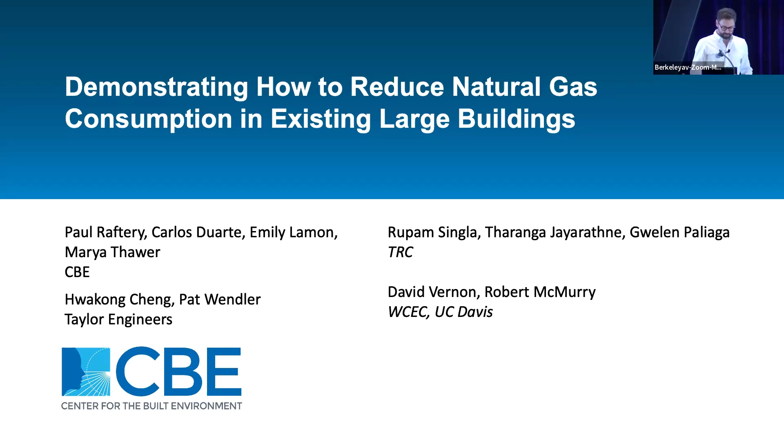Today I'm going to be talking about existing buildings and how we can reduce natural gas consumption in that building stock. So this is part of a much larger California Energy Commission funded research project that was focused in on the space heating and hot water systems in these buildings. And the reason we focused in on that is because it's by far the largest gas consumer. Relatively little in large commercial buildings is used for domestic or service hot water. Most of it's for space heating.

And this project was pretty large. It had a broad scope. Some of you may have seen me speak about this or aspects of this in past meetings, but we were measuring performance and losses from these components in both the lab and the field. We were gathering data and analyzing it from literally hundreds of buildings nationwide. And then we were also going out into real buildings and demonstrating how you could do reductions in a couple of different sites. And today I'm going to be talking about the two primary demonstration sites that we had for this project.

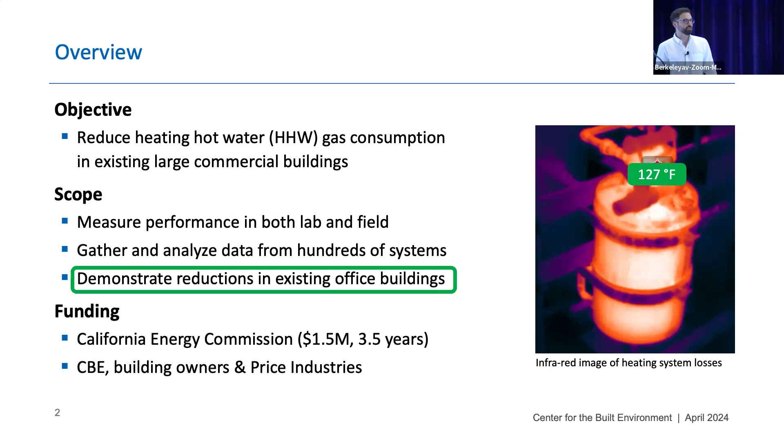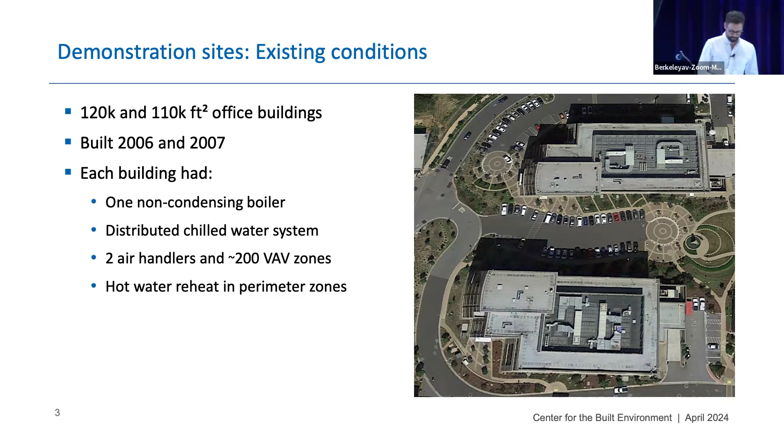At a very, very high level, the efficiency measures were we brought the existing controllers up to ASHRAE Guideline 36, so kind of a standard set of control sequences that represents current industry best practice. And then we replaced the existing boilers with very small high turndown boilers. That project was planned to happen anyway, so it was the kind of end of life redundancy project. So we were leveraging that as part of this with our partners, the building owners.

Now, it's important to note that the controls work we did here was really in-depth. Though we didn't replace the existing controllers throughout the building, we did go down to every single individual zone level and fix everything we could without replacing the controllers. So we corrected zone minimum airflows, we identified and fixed passing valves, we capped bypasses at the zone level.

Up at the air handler, we not only made sure that there were resets for supply air temperature and hot water temperature, but we actually made sure they were working correctly and then used trend data to basically ensure that they're resetting over a really wide range of temperatures, much wider than you would normally see.

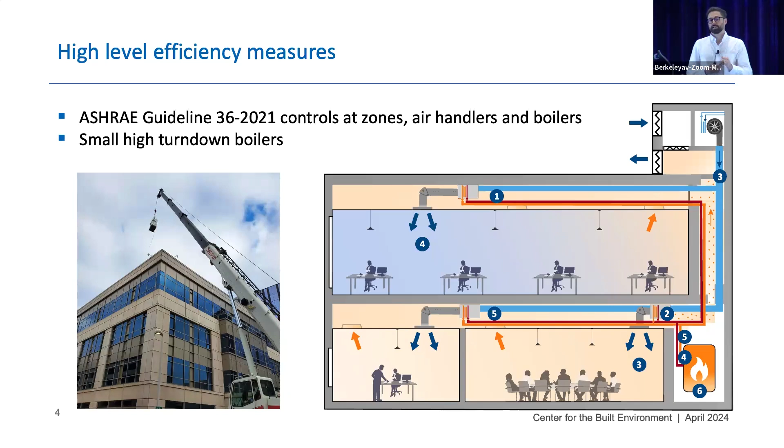So for example, these buildings were designed and operated to 180 Fahrenheit supply water temperature. In the post-retrofit condition, the maximum temperature they run at is 140, and they sometimes reset as low as 90 Fahrenheit supply water temperature in the summer in an existing building. So we really went to a lot of detail before we replaced the boilers. And then when we replaced the boilers, we put in really small high turndown equipment.

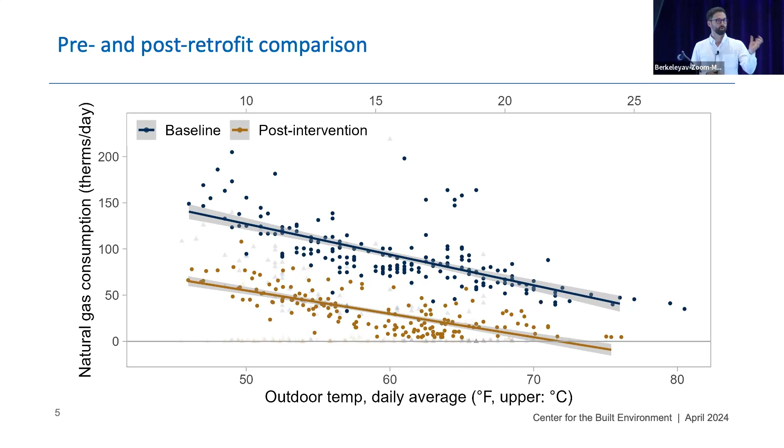And the results show really large natural gas savings. This is the PG&E utility bill meter. This is daily gas consumption on the y-axis. And then on the x-axis, we have the average outdoor temperature on that day. The blue line shows the pre-retrofit condition before we did anything. And then the yellow line shows the post-retrofit condition, which is both the effect of the boilers being replaced and the controls retrofit. Overall, this is a 71% reduction in natural gas annually on this building.

We had a second building. We saw 69% gas savings in this with a slightly higher base load in that building. So overall, we're seeing really huge site level emissions reduction here. 70% of the scope 1 emissions of these buildings was cut by these combined measures.

On the electricity side, we also saw savings, but those are a little bit more hard to quantify because we had to rely on submeter data that was installed after the boilers were operational, which is also in the middle of the pandemic, so it's a little bit messier. But as best as we can tell, there's about a 20 to 25% electricity savings on the fan energy and a 40% chilled water savings on the building where we had the meter to quantify that.

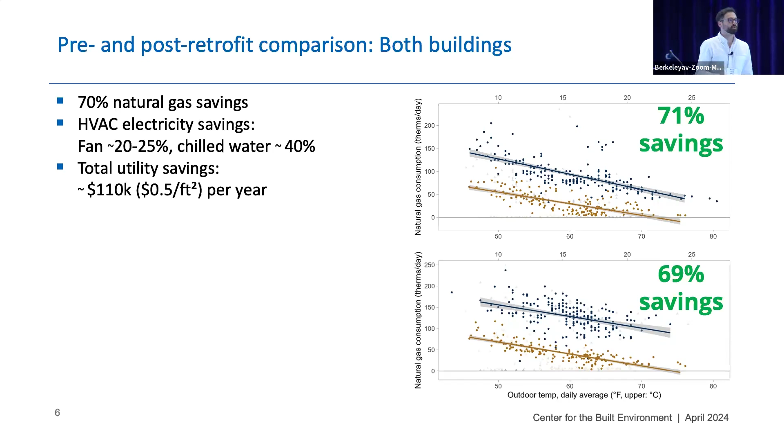Overall, the estimated utility savings are over $100,000 a year, or about 50 cents a square foot per year from the combined set of measures. So it's super clear to me that if we want to really reduce emissions in the existing building stock, we should be going out and doing this at scale in every building. And I hope the portfolio building owners in the audience are looking at this and going like, how can I leverage this, and come talk to me afterwards.

But if we wanted to reduce emissions further in these specific buildings, these two specific buildings, what would we do? So we also looked into that. And of course, the answer is you would electrify to further reduce natural gas consumption by installing a heat pump to service that heating load. And there's always a question about how large that heat pump should be. So this is one of the things that anybody who's working on these projects faces.

And you have to consider things like first cost and operational cost, space, weight constraints for a roof that wasn't necessarily built to support the weight of an air-to-water heat pump, service capacity, embodied carbon of the equipment and the refrigerants. And I wanted to kind of walk through some of those decisions and look at what that would actually look like for these two buildings.

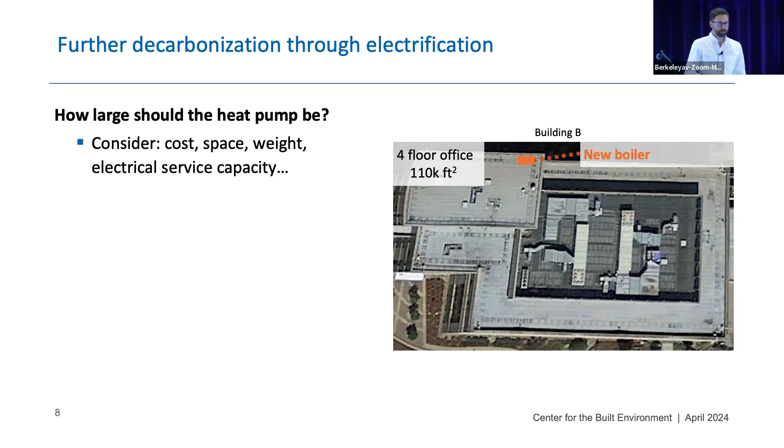So this image here is the satellite image of one of the rooftops, and the footprint of the two new boilers is there in orange. This is what an air-to-water heat pump would look like if you were to fully electrify that while maintaining the exact same capacity as those two new boilers, which are very aggressively sized.

So we also wanted to look at a partial electrification option here, and that's the footprint of an air-to-water heat pump that's 14% of the boiler capacity, and that's at the heating design day condition for this location. That corresponds to actually being able to serve about 20% of the peak measured load in the building, because there is a little bit of a redundancy requirement for the actual site.

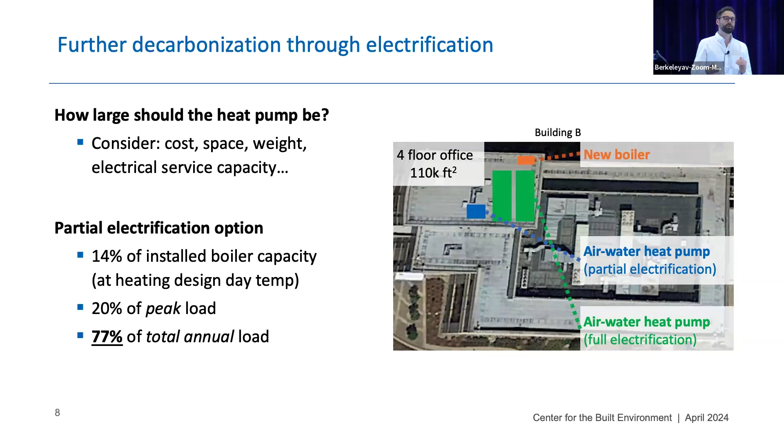But the really interesting thing is that that tiny little heat pump can actually electrify 77% of the annual heating load in these buildings. And that's for a couple of reasons. One is because most of the time heating loads are really low, so you just don't need that capacity. And then on top of that, as it's warmer outside, when you move away from those heating design day temperatures, heat pump capacity also increases. So when you combine those two things, you end up with a huge amount of the load annually that can be electrified.

And there are other considerations, mainly that electricity grid emissions vary with time. Here you're seeing an actual real day just this year in February, and the x-axis is time, and the y-axis is the grid marginal emissions. These are the short-run emissions. So the way I think about this is, if I was going to consume 1 more kilowatt hour of electricity right now, what is the generator that would be responding on the grid by increasing its output? And as you can see, in the middle of the day, it drops down because California has a pile of solar on the grid.

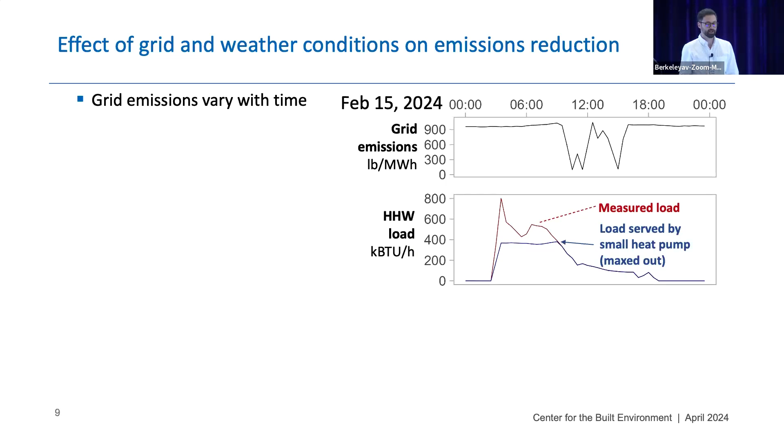Now, layering on the measured load in this actual real building, you can see that is the red line. And currently, that's being serviced by a gas boiler. If we had that tiny little heat pump, it wouldn't even be able to meet the load on a February day, not to mention on a design day. You can see it's maxed out there, that little blue line.

But you might also notice that the times when you have a lot of heating, in this post-retrofit condition where we fixed up all the controls and got rid of all the simultaneous heating loads that shouldn't be there in the first place, the times that you have the remaining heating generally correspond with high grid emissions hours. It's winter mornings when the sun isn't up. On top of that, it's colder temperatures, so your heat pump is less efficient and it has less capacity.

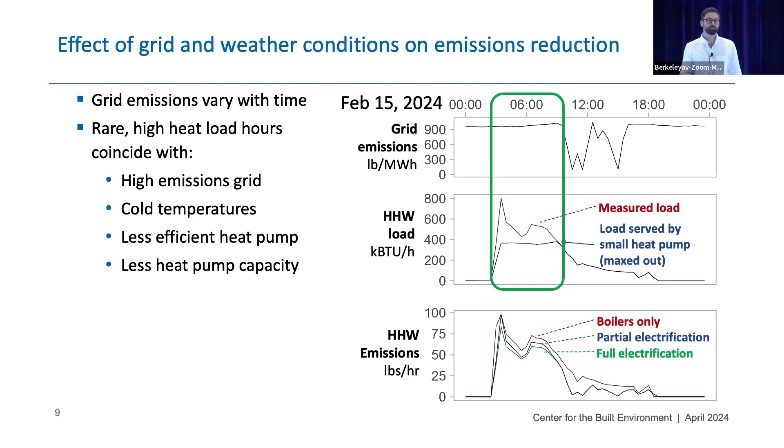When you layer all these things together, when you look at the actual heating emissions from this actual real system and then the two alternate cases, you see that there's relatively little emission saving on today's grid right now from this particular intervention at those particular times of day. You do see savings from partial electrification and you do see savings from full electrification, but at that specific point in time, they're not as large as many people would expect.

And stepping back for a second before we show the annual results, we saw enormous emissions reduction potential with operational cost savings from a deep energy retrofit measure. We saw 70% on-site natural gas reduction and 50 cents a square foot per year of energy savings. If we do that first and focus on that at scale, it will make electrification of the building stock easier because you'll have smaller equipment, and it will put less stress on the grid when you go and electrify because there'll be less loads on the grid too.

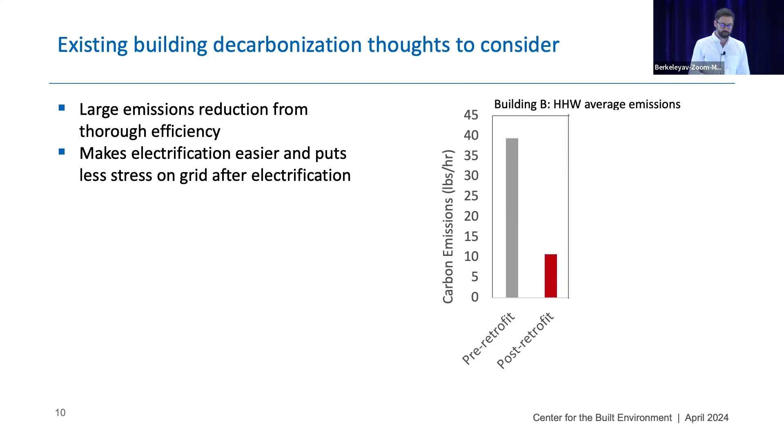So on the right, you're seeing the annual estimate for the actual emissions from this building, just normalized per hour. And you can see the pre-retrofit and the post-retrofit case. On today's current grid, we do still see substantial emission savings from electrifying, even on the grid right now. That's not to mention what will happen over the lifetime of the equipment. But there's not much of a difference between the partial electrification case and the full electrification case, after assuming you've done the efficiency measures first, and that is a big assumption.

But the big difference here is that the partial electrification comes at a fraction of the first cost, a fraction of the embodied carbon and refrigerant and general environmental impacts of doing so. And maybe more importantly, for some of the current equipment on the market, the actual heat pump equipment itself will be operating at more uniform capacities and probably at higher performance rather than cycling, which you would have if you had a huge air-to-water heat pump up on the roof there.

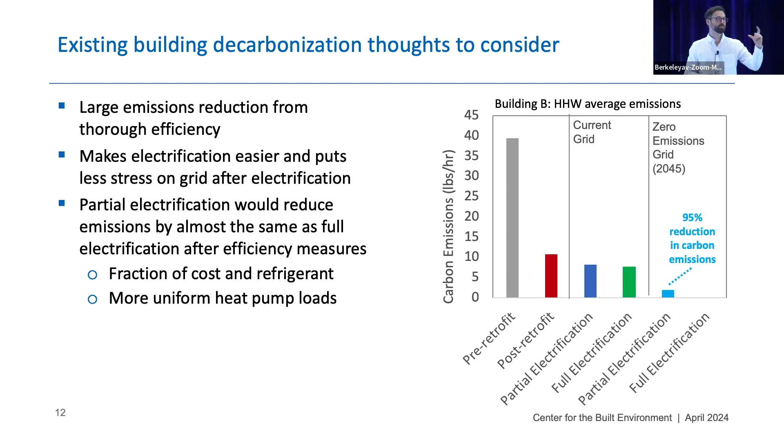Looking out further to California's commitment to have a fully clean grid by 2045, you can see that even in that scenario, partial electrification gets you 95% of the way to emissions reduction compared to the pre-retrofit state in this particular building. So we can get a huge way there by going through partial electrification. But it's important to recognize that we got the biggest chunk by efficiency measures that are much less invasive, and we should be doing that at scale.

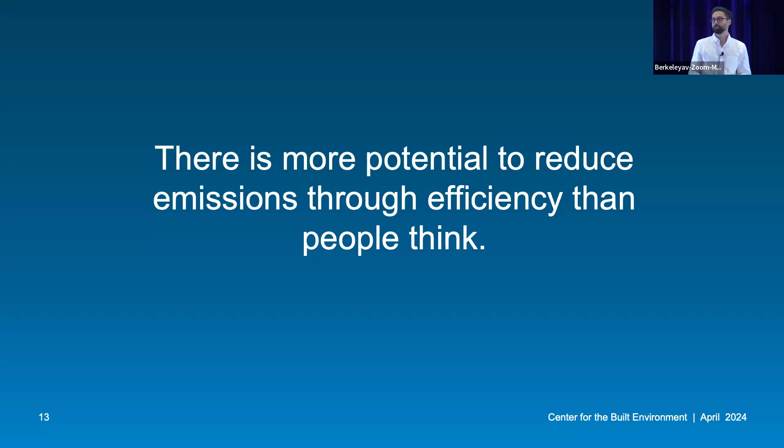And that's really what I learned in this project, is that there's way more emissions reduction potential out there from in-depth efficiency retrofits than people are internalizing and thinking about at policy levels, at building owner portfolio levels. This is the way you can save serious emissions, and we should be doing that first, and then electrifying should be our priority.

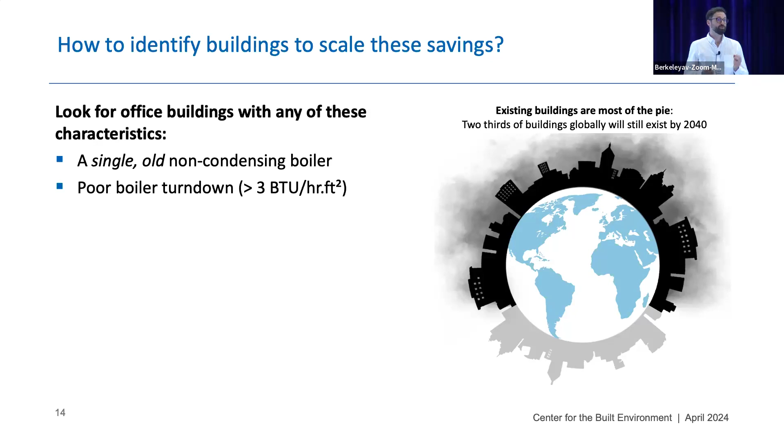So I won't go into these points in detail, but if you are working on these projects and looking to repeat this or scale this, as well as the actual demonstrations, we developed a couple of screening methods and applied them in some studies to help identify buildings that would be really good candidates for a similar retrofit. Basically, what you're looking for is large, oversized, or poor turn-down boilers in the existing building, indications of significant controls problems like incorrect VAV and minimum airflow rates, or heating plants that run 24/7 and don't reset to really low water temperatures in the summer. Those are all great indicators that there's a lot of savings here from relatively low cost measures.

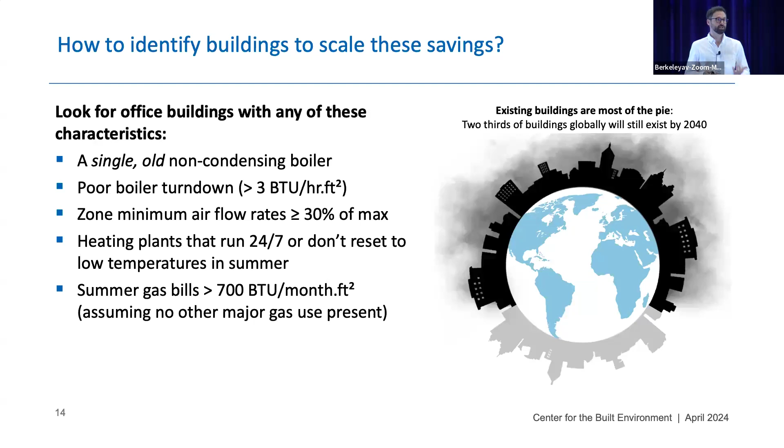Another one you can do is, if you don't have any mechanical information about the building at all, and you just have the gas bill data for each month of the year, if you have an office building that's consuming a decent amount of natural gas in the summer months, chances are there's a substantial energy savings there, because realistically, if you're seeing that and there's no gas consumer on site other than an HVAC system, it's very likely that you have a problem with controls, either at the boiler or the air handler or the zone, or a combination of those.